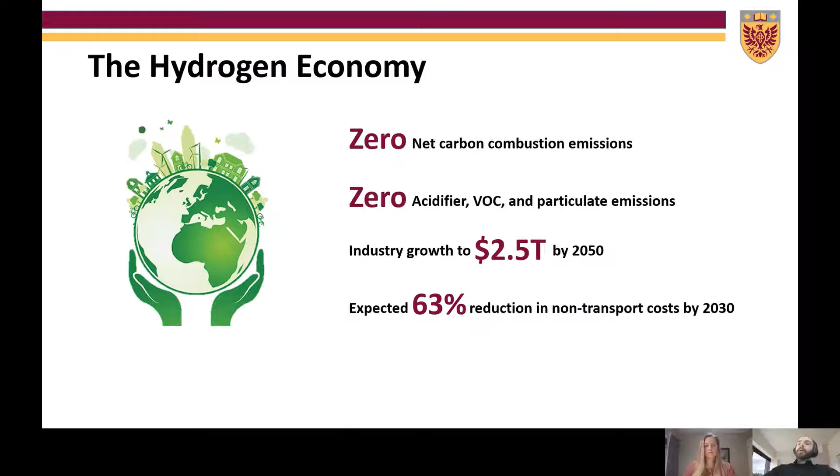Hydrogen power plants are more expensive than the status quo in the short term, but show significant promise to reduce in cost over the next 10 years, and the hydrogen economy as a whole has the potential to grow to a $2.5 trillion market by 2050. To achieve this domestically and internationally, significant investment in manufacturing, scaling production, and creating a sustainable market demand is necessary.

A critical design decision in this project is to produce blue hydrogen or green hydrogen. Blue hydrogen is produced via fossil fuels with carbon capture, while green hydrogen is produced via electrolysis with electricity produced by renewables. Long-term, green hydrogen is expected to be the dominant production method. However, it is not expected to be economically competitive until sometime in the 2030s.

Blue hydrogen, on the other hand, is much cheaper to produce and serves as a great candidate for hydrogen production until the electrolysis method becomes more competitive. We have decided to make blue hydrogen in an effort to make this process as economically competitive as possible.

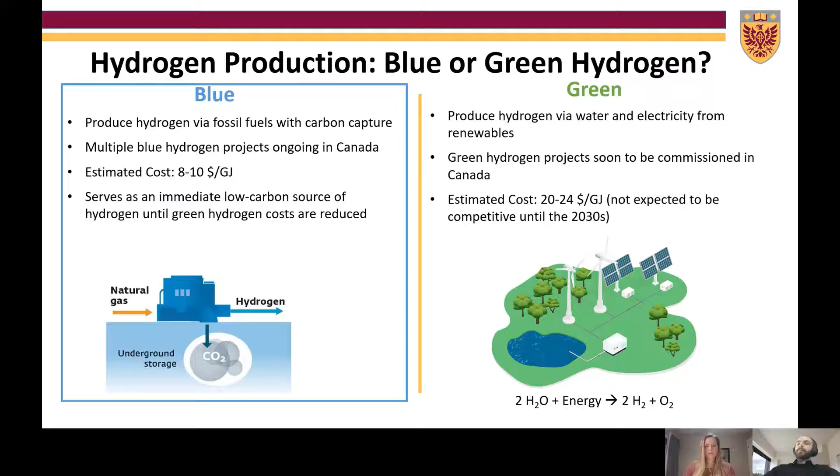Our process consists of 3 stages: hydrogen production through chemical looping reforming and the water-gas shift reaction, hydrogen purification and carbon capture through solvent-based absorption technologies, and finally energy production through a cogenerative turbine and steam process.

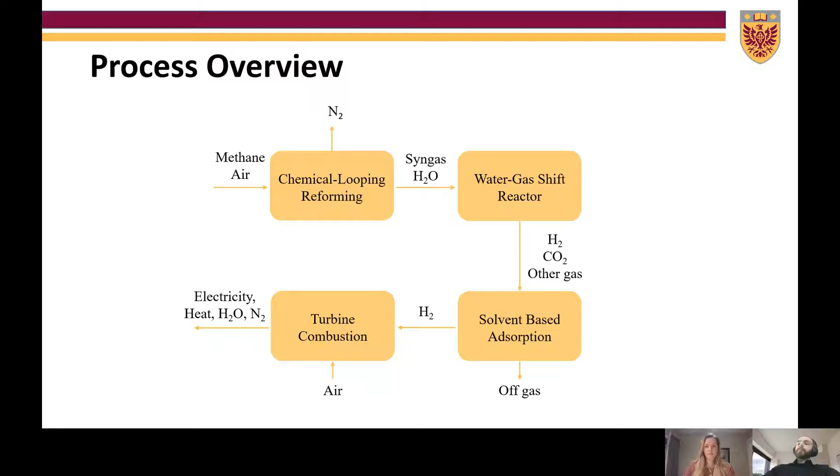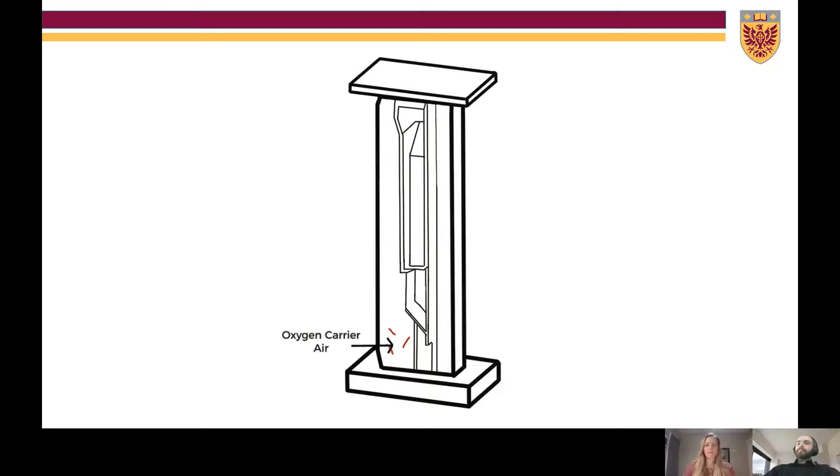The chemical looping reforming component includes an air reactor, fuel reactor, and downcomer between them. Air and an oxygen carrier, such as perovskites with 5% nickel oxide in our case, are fed into the air reactor. The oxygen carrier binds to the oxygen in the air and nitrogen is eliminated. This oxidized metal now brings purified oxygen through the downcomer to ensure no mixing between the air and fuel reactors.

Once it reaches the fuel reactor, methane and water are fed into the reactor to partially oxidize methane to produce syngas, carbon dioxide, and water, while the oxygen carrier gets recycled and reoxidized for a continuous process.

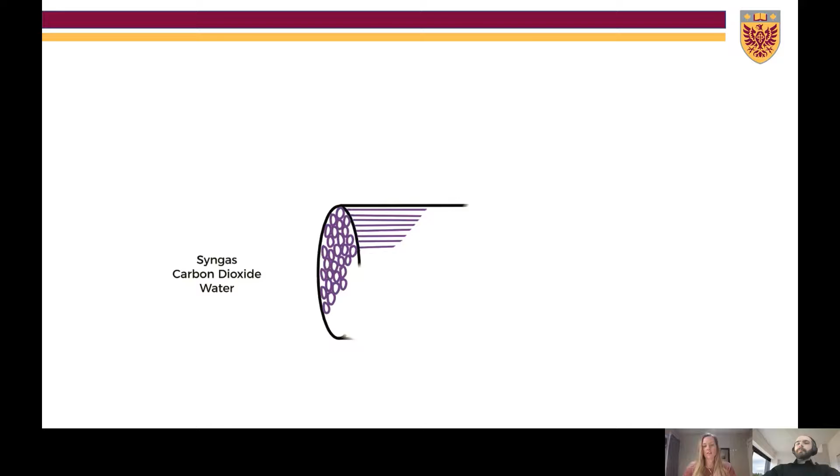The syngas, carbon dioxide, and water is then fed into the water-gas shift reactor, which in reality is a bundled tube reactor with packed copper oxide particles, but is modeled as a plug flow reactor. Each control volume exists in equilibrium, the reaction pushing towards the products of carbon dioxide and hydrogen gas, purifying the stream to our target products and eliminating the unwanted compounds.

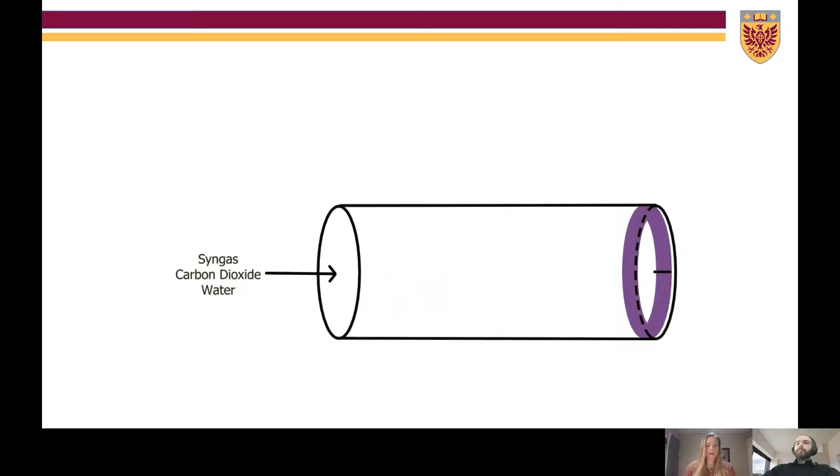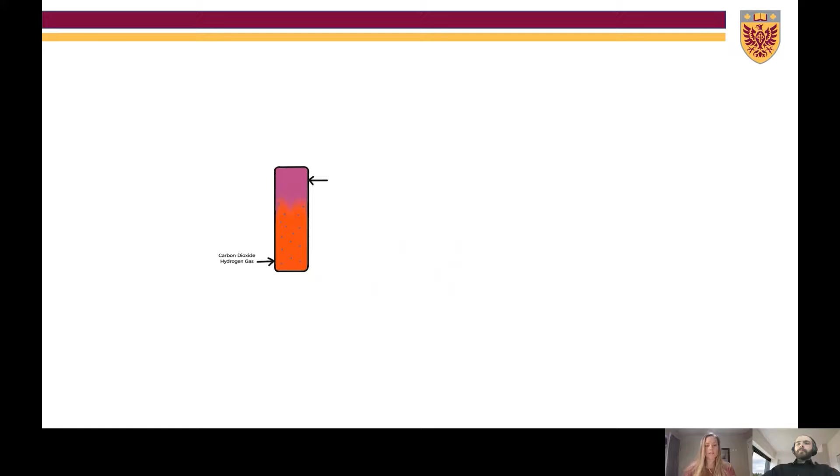The carbon dioxide and hydrogen gas is then sent to a solvent absorption process, where they are fed into an absorbing column at low temperature and ambient pressure. The lean solvent enters the top of the packed column and flows downwards. As gas rises through the column, carbon dioxide is chemically absorbed into the solvent, bringing it from the gas phase to the liquid phase. The purified gas then leaves the top of the column consisting of hydrogen and water.

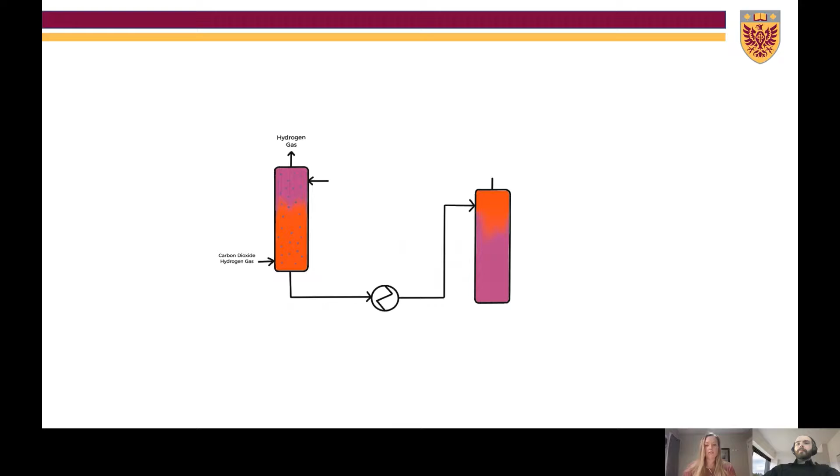The CO2-rich solvent then leaves the bottom of the column, is heated and pressurized, and passed through the stripping column, where CO2 is desorbed from the solvent and is captured at the top of the column as a high-purity gas. The lean solvent exits out of the bottom of the stripper, is cooled, and then recycled back to the absorber column for reuse. The carbon dioxide is captured and sequestered, while the gaseous mixture is flashed to remove the water and pure hydrogen gas is left.

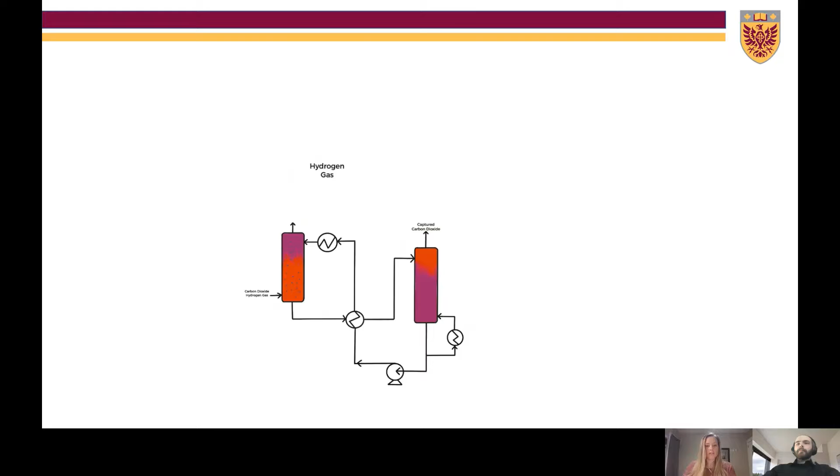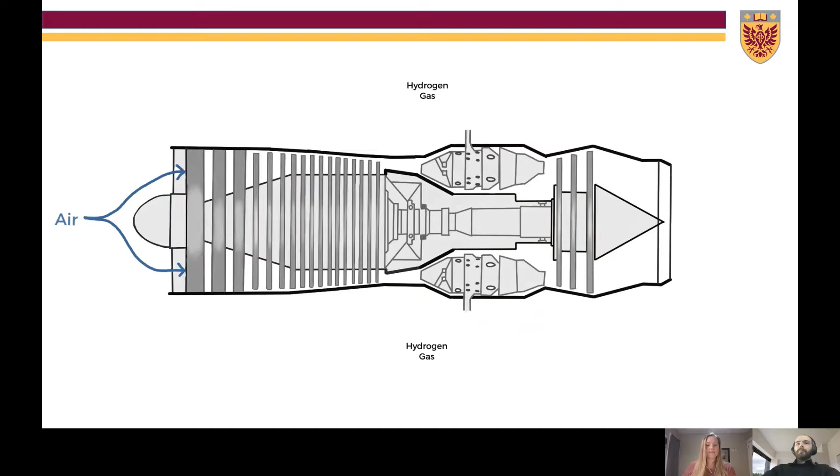This hydrogen gas is then fed into the turbine. Air first enters and is compressed during the compression phase. Hydrogen gas is introduced during the combustion phase to make energy and heat, which is used to power our grid and feed our cogeneration plant.

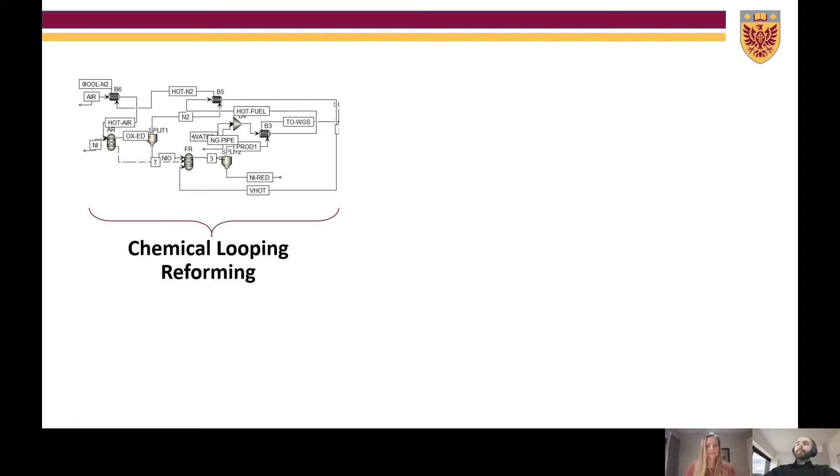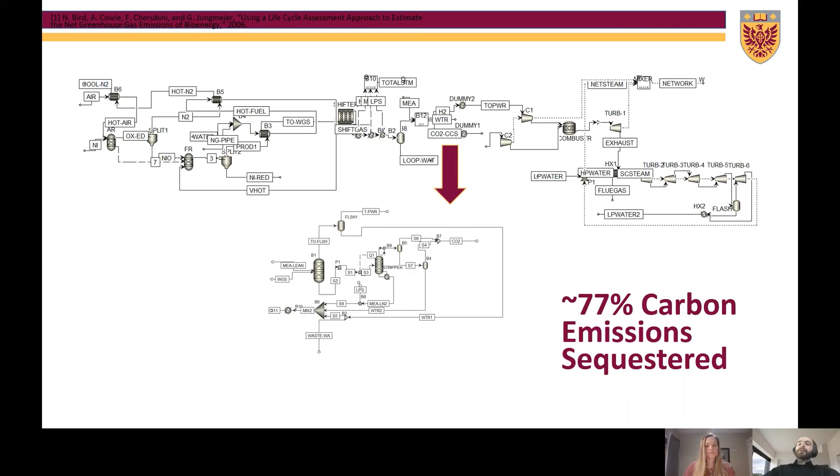Our process was simulated using Aspen Plus, and the following slides show the chemical looping reforming, water-gas shift reactor, solvent absorption, and turbine and cogeneration portions of our simulation. With our process, approximately 77% of the CO2 was sequestered from the solvent-based absorption. We are currently performing an overall cost and life cycle analysis to better understand the great magnitude of this transition to a hydrogen economy.